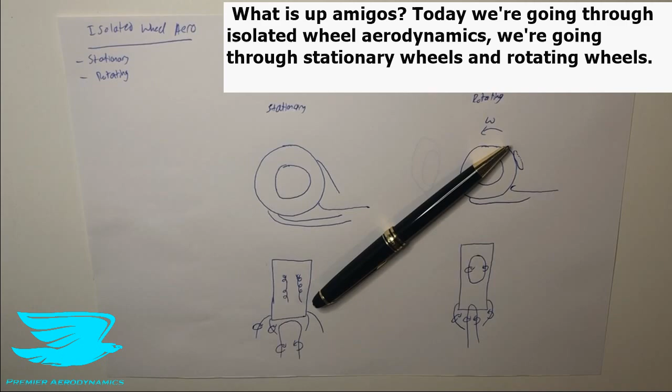What is up, amigos? Today we're going through isolated wheel aerodynamics. We're going through stationary wheels and rotating wheels. So an isolated wheel is where we don't have a wheelhouse around it, we just have it out in the open. So for example, in F1.

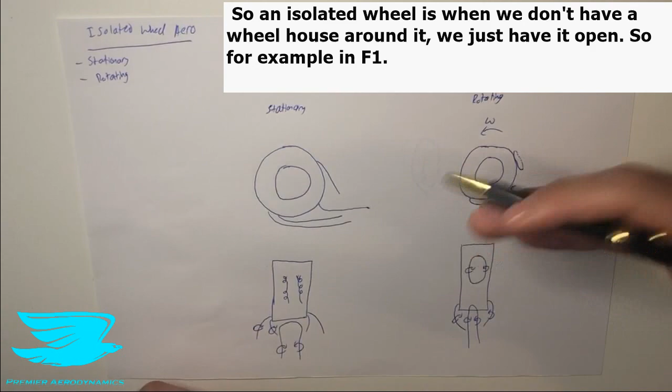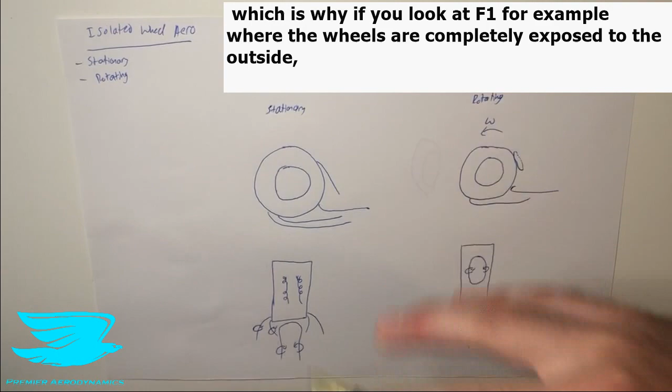The biggest problem with this is that this particular situation is actually the most draggy situation for wheels in general, which is why if you look at F1, for example, where the wheels are completely exposed to the outside, they go to so much effort to redirect the flow in certain ways to reduce the drag of these wheels. So this is really the worst case scenario.

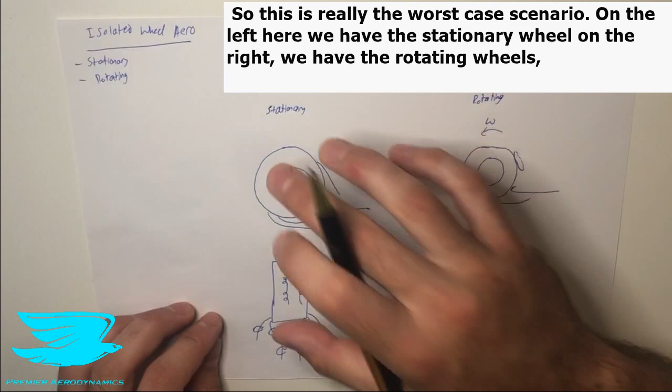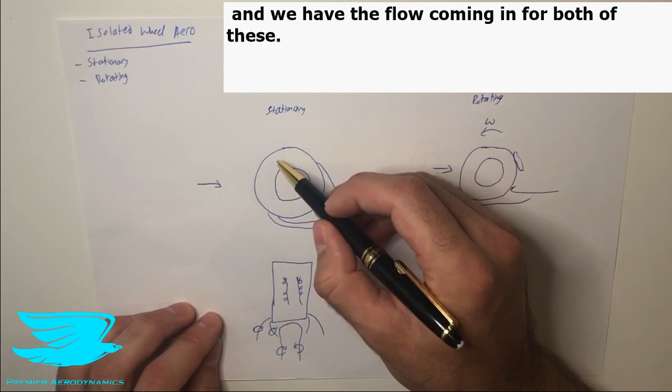On the left here, we have the stationary wheel. On the right, we have the rotating wheels. We have the flow coming in for both of these. Often they hit the front and we get stagnation pressures, and at the back we get a wake. Over the top it might separate. This results in a lot of complex flows, which we'll go through in a second.

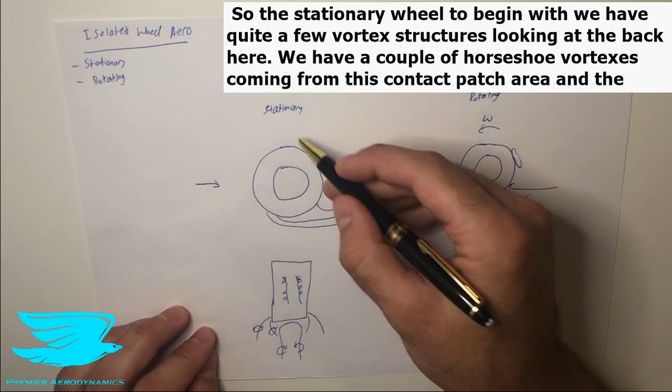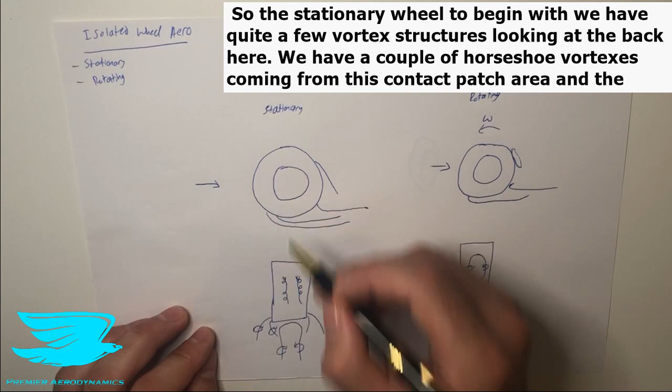So we have the side view of each wheel, and back here we have looking at the back of the wheel. For the stationary wheel to begin with, we have quite a few vortex structures. Looking at the back here, we have a couple horseshoe vortices coming from this contact patch area and the front shoulder, and they rotate inwards. Then at the back of the wheel, we have this horseshoe vortex which forms just around here. And then over the back part, we have two vortices coming off the back, which then rotate in opposite signs as well.

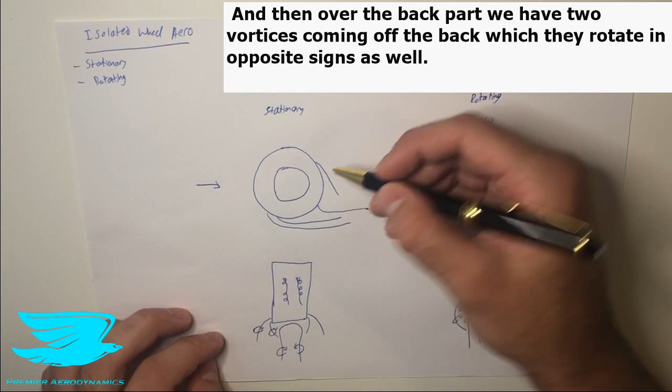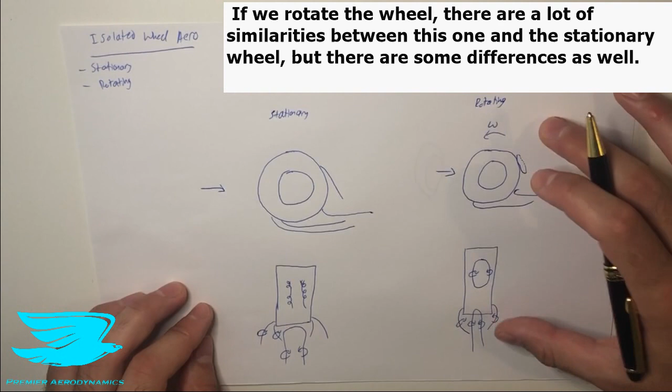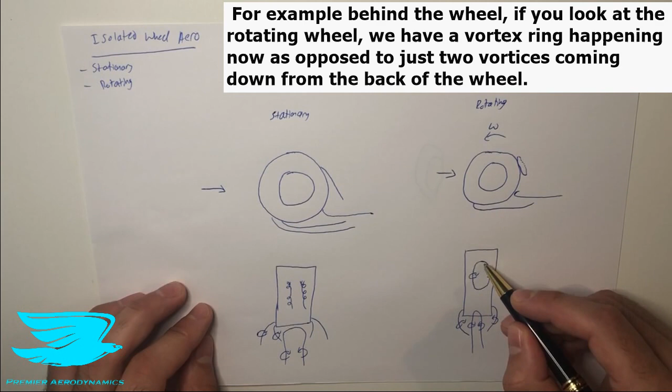If we rotate the wheel, there are a lot of similarities between this one and the stationary wheel, but there are some differences as well. In general, this is a little bit easier to understand because we have fewer vortices and some of the vortex systems are more connected. For example, behind the wheel, if you look at the rotating wheel, we have a vortex ring happening now as opposed to just two vortices coming down from the back of the wheel.

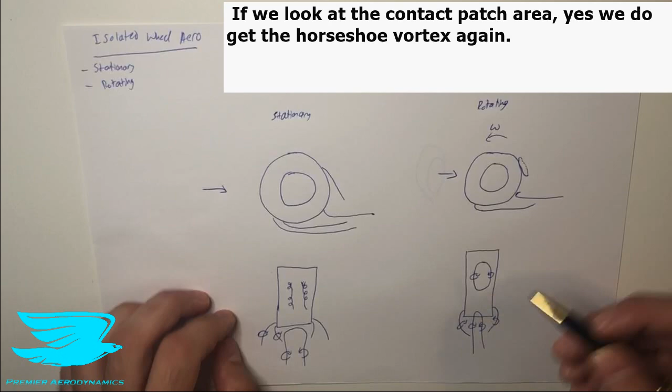If we look at the contact patch area, yes, we do get the horseshoe vortex again, and interestingly, it gets squished a little bit behind the wheel as opposed to this one which is a little bit fatter. At the front of the wheel, the contact patch and the shoulders, we actually lose one of these horseshoe vortices, and we have one here. As we go downstream, it's very common for these vortices to merge with the vortex line of the same sign, and then it becomes one mega vortex.

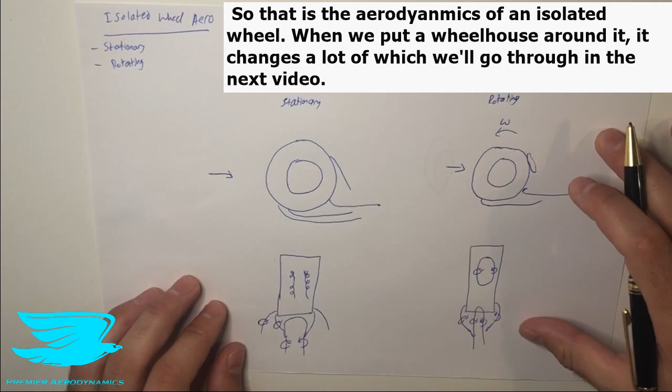So that is the aerodynamics of an isolated wheel. When we put a wheelhouse around it, then it changes a lot, which we'll go through in the next video.